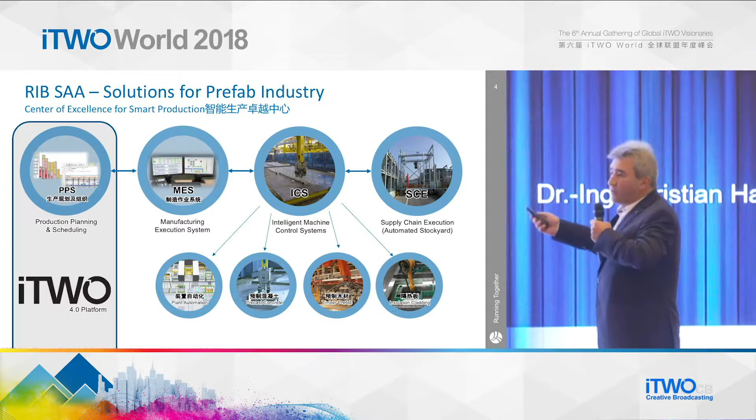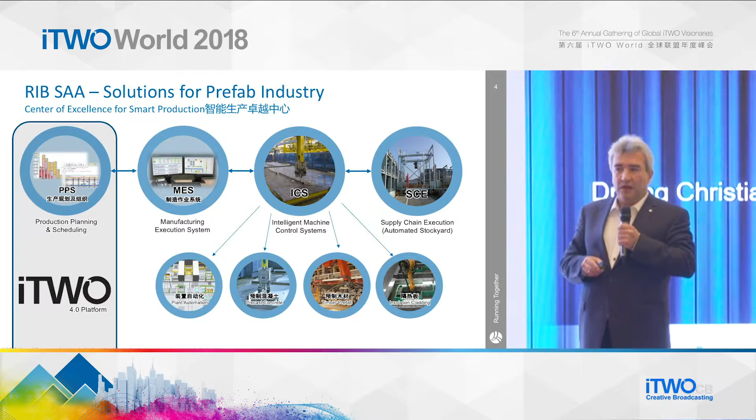That's about our solutions, our capabilities for the precast industry. You see, PPS, production planning and scheduling, that's the anchor in the iTWO 4.0 world. That's where we start implementing the precast planning task, the project management for prefabrication in general. Then it goes to the production, and the MES, the manufacturing execution system, is more or less the brain of the production. There all the planning is done for the shop floor. ICS stands for intelligent machine control. That's the robot systems, the transportation system, the stockyard systems. SCE is a smaller part, that's automated stockyard management, which we will also apply for my home, for example. And on the lower level, you see all these control tasks, the control machines, the different robots for different tasks.

What I want to say in this speech is, first, I go back to modular construction because that was the topic for today. First I want to summarize the building systems. Mr. Jösch has done a lot of that, so I can really speed up that part. Then I want to show you some details about plants we already realized together with partners in Germany, in Singapore, and all over the world. And then I want to line out the end-to-end process we can manage by using iTWO. What can we provide in tools to make the job on the shop floor easier for the people, to bring the work to the people and not the people to the work, as André lined it out in the last speech.

Modular building systems, there are typical methods. If we talk about concrete, then we can cast it in module molds, either with a movable kernel or with a kind of Upcrete technology. That means you pump the concrete from underneath into the mold and get it cast as a complete mold, or cast it in a so-called C mold and turn it by 90 degrees sidewards.

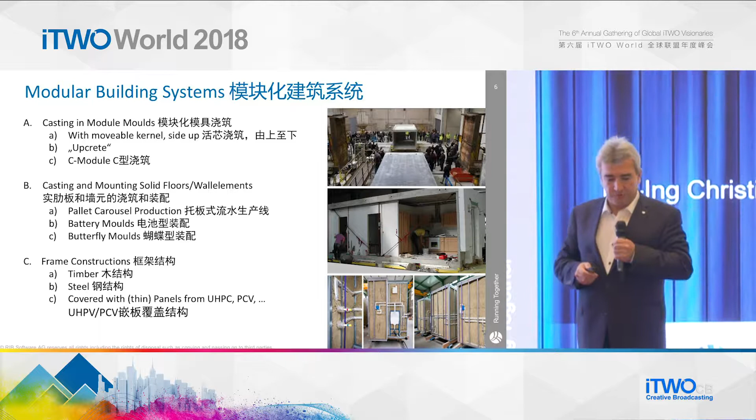Once the module is ready, you need a lot of tasks to finish it, to make a complete installation in the production facility before you deliver on site. You see on the right side some pictures of such a finishing line. MEP is a big issue. Then bathroom installation is a big issue. Flooring, roofing. All these things have to be done on a kind of continuous work on the module to get it done and to get it to the stockyard.

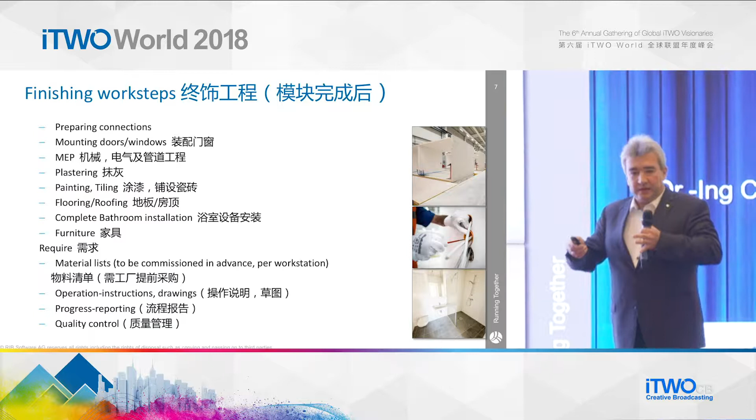And to support that process, we had to develop a lot of new functions in our MES system to support that by means of material lists, by means of instructions, so that the operator knows exactly what to do, that he can see the drawings on his workplace. And we also want to get a feedback about how long he has to use for this task, and to get a feedback about a bottleneck analysis of the process. And last but not least, quality control is very important. Otherwise, you plan with repair from the beginning, which is definitely the wrong way to do it.

One of our recent projects, we are nearly finished, is at Max Bögl. Max Bögl is the biggest precast company in Germany, and they have set up a completely new factory for producing a module system for modular housing. They have invested a lot of time and a lot of effort to find out what's the best building system for it. And they outlined also the big advantages they get from that.

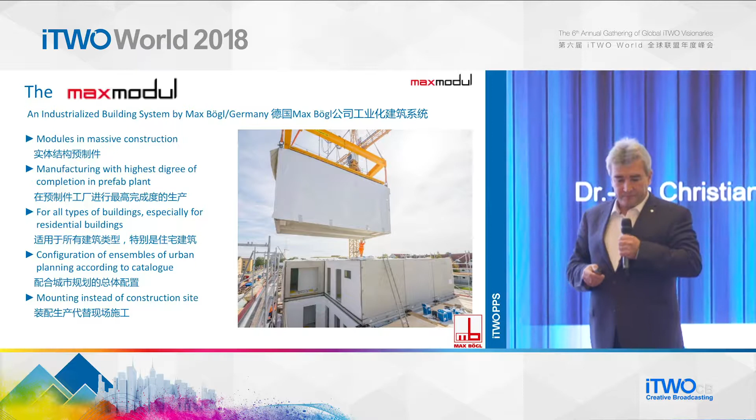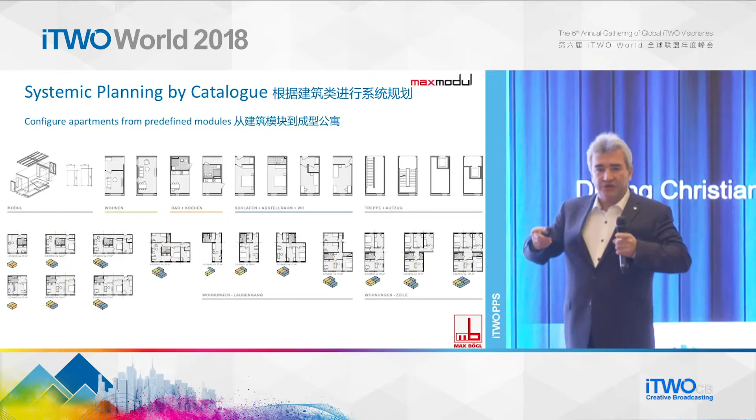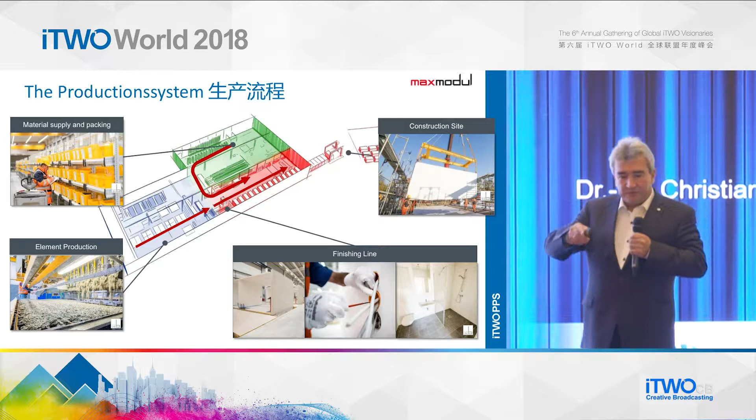If we look at the production line, you see at the upper left corner that there is enormous stress on the logistics. You have to prepare all the material on time to have it ready for all the work steps on the finishing line. The element production, that's well known, more or less. We produce the wall panels, we produce slab panels, and we put them together in a module. But to have all the parts for MEP, for painting, for tiling, right on time, right on the spot where it's used, that's a huge logistic task to do. And at the end, we have to ship it in a more or less container size, as Chris said in the beginning, and then mount it to the building itself.

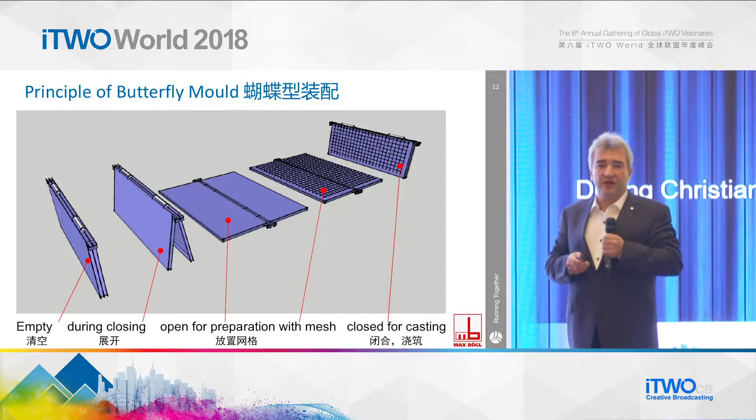What's now a battery, a butterfly mold? You see it here in a sketch. There are two molds which combine the advantage of horizontal preparation with reinforcement, with mount parts, and then clap it, hang it on the crane, put it in a battery mold, and cast it there to have two smooth sides after casting. And that works like this. This crane is fully automatic. The MES knows where to put it, how to put the two sides together, and then an automatic concrete spreader does the rest and fills it up with concrete.

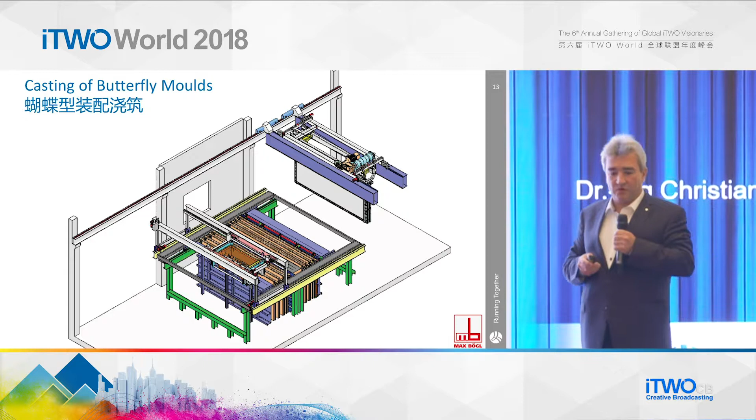The production line for the finishing task looks like this, and it starts, and that's also a very important thing to point out, with, let's say, cosmetics on the concrete and milling of the connection plates. The type of connections Bögl figured out was to cast connection plates with the modules, and then put the whole module in a big mill and mill it on all sides to have really accurate edges to put the modules together at the construction site.

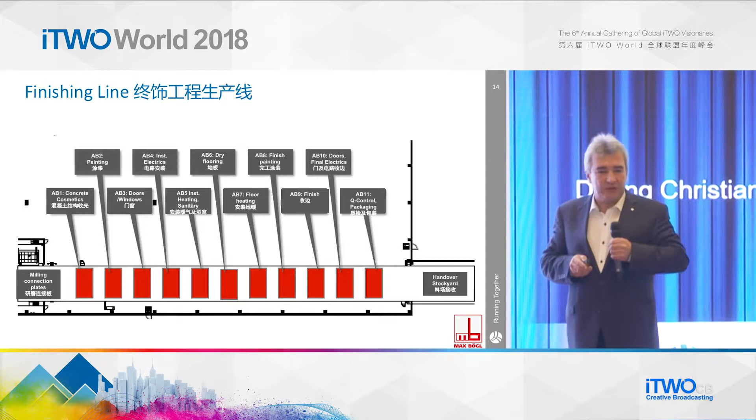That's different from many other systems. I just had a discussion in KSA, in Saudi Arabia. They say we don't have an earthquake issue at all. We simply put them together. We don't need any connection at all. That's completely different, and in China it would be much more difficult; you have to spend much more brain and much more ideas on the connections to cope with the earthquake issues you have here.

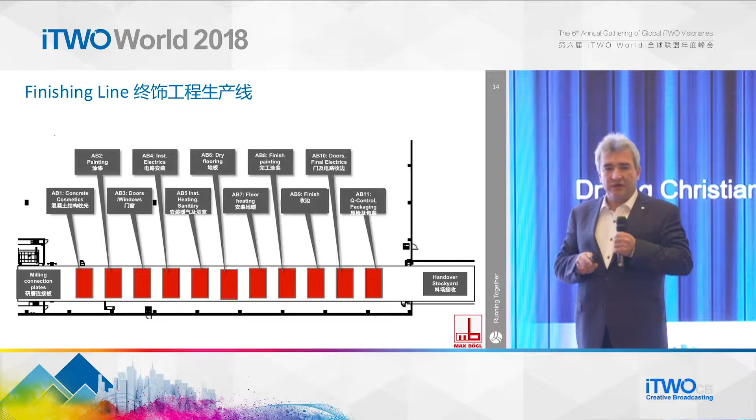A few photos in the finishing line. You see the modules move through the finishing line, and every work step is designed so that it can be done within 1 hour. So every hour, one module comes out of the production hall and can be either stacked in the stockyard or directly transported to the construction site.

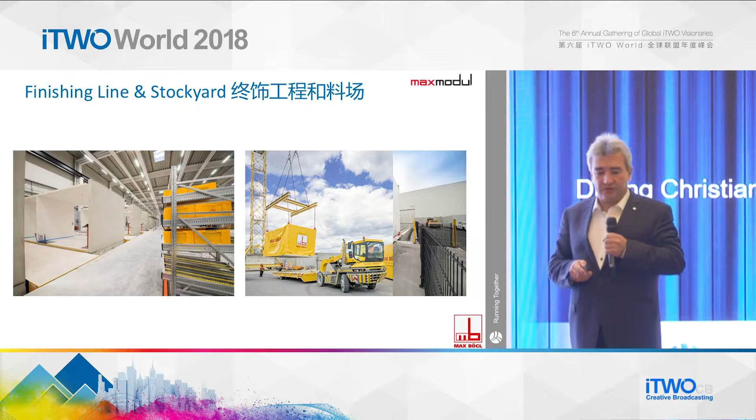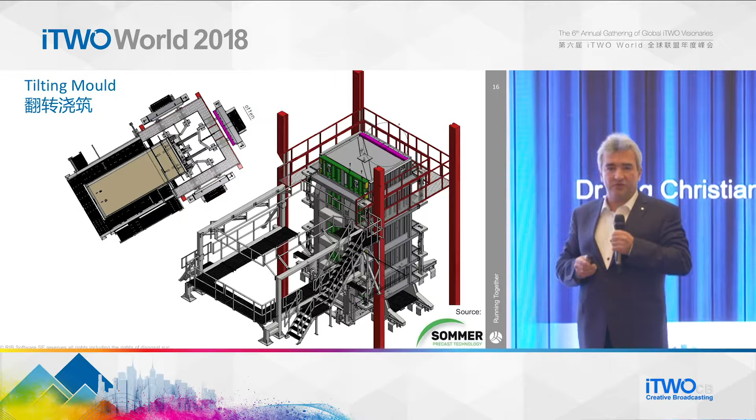A second system I want to outline shortly, that's a tilting mold, where it's a really big machine where you produce the whole module with a movable kernel and then tilt it by 90 degrees, so upside down, more or less. And that's used for garages, for example, but even also for room cells like this. We have 2 clients in Germany which are using that kind of system for doing their modules.

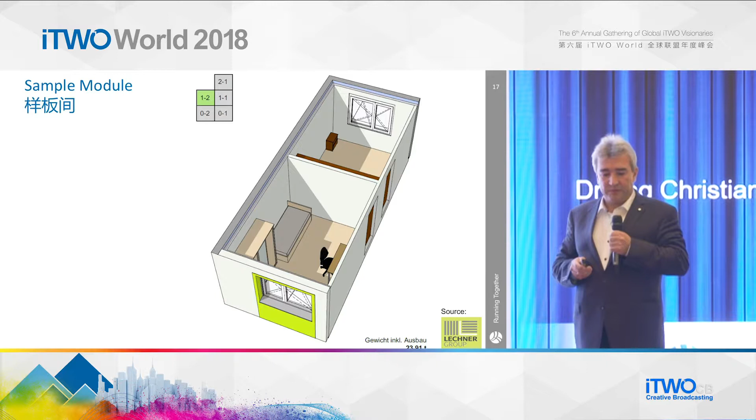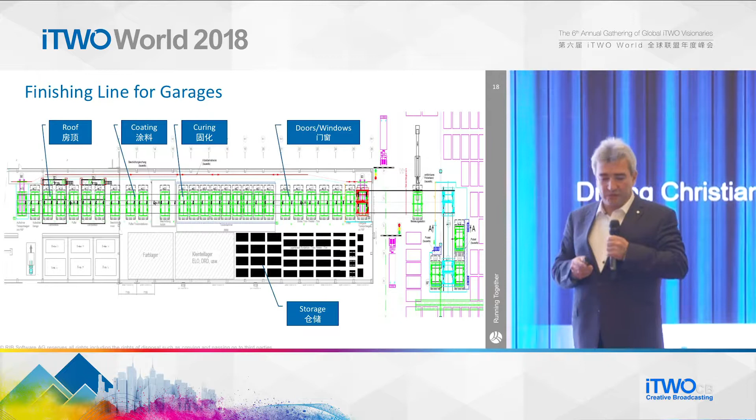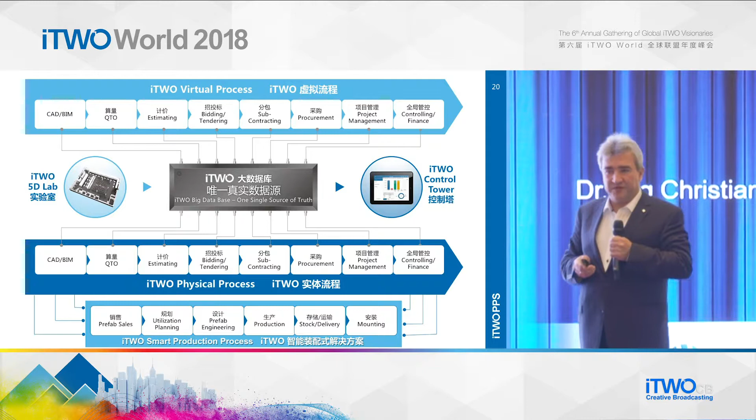We support the whole end-to-end process for all kinds of prefab constructions, especially for module construction. We have extended our offers. This process you know well, or we have seen it several times in the iTWO charts.

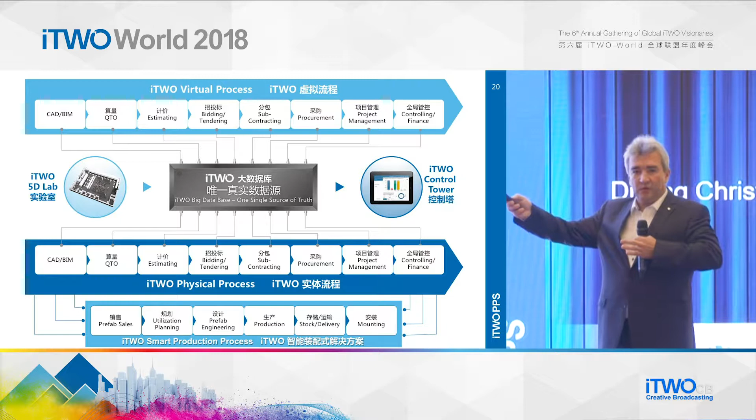So that's the digital twin, which we start first. We do the virtual modeling, and then we are able to compare it with the physical process. And in every stage, we can see what's the difference in budget, what's the difference in time. And if we add the precast process, then we have that already included in the PPS modules directly in iTWO 4.0.

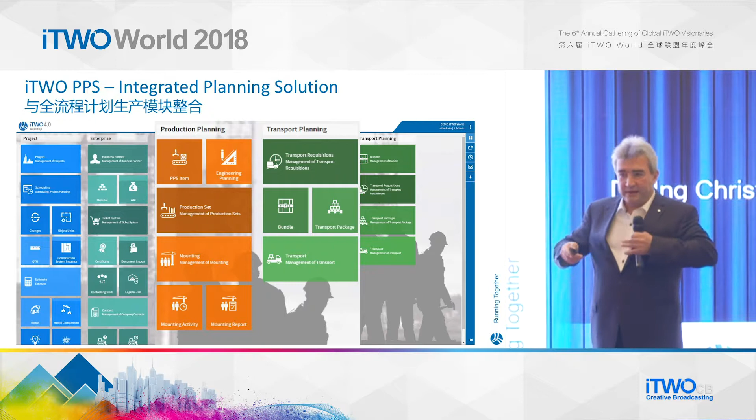And it looks like this. That are the modules we supply in iTWO 4.0. And I want to point out in the process the prefab engineering, which is a very, very important step in between, because there you take the design drawings and you add all the details for production. Otherwise, you won't be able to do any automation in the production if you don't add all the geometric details of the mounting parts, all the details of the reinforcement. That's really compulsory to get any level of automation in your plant.

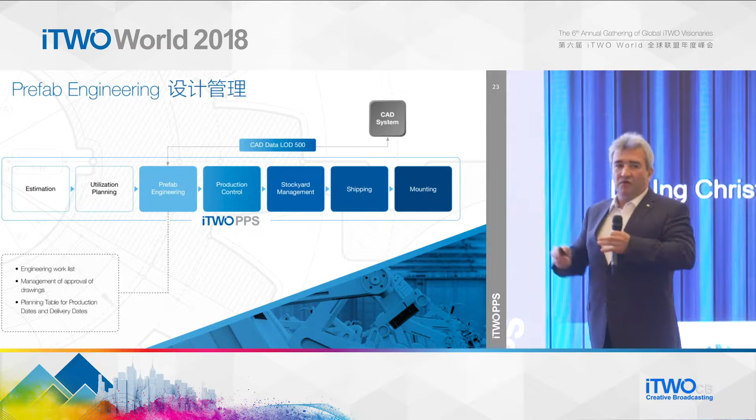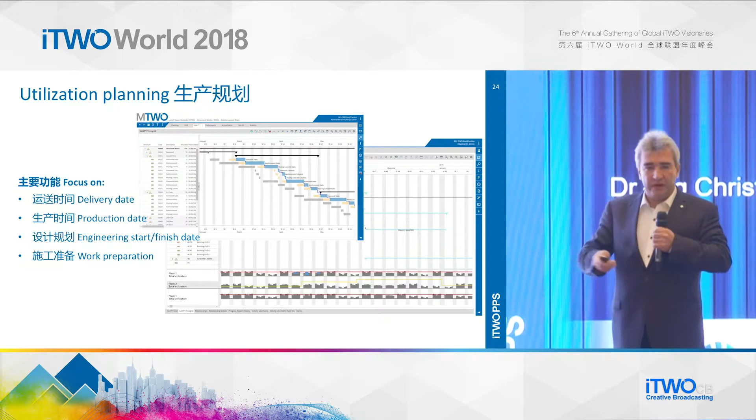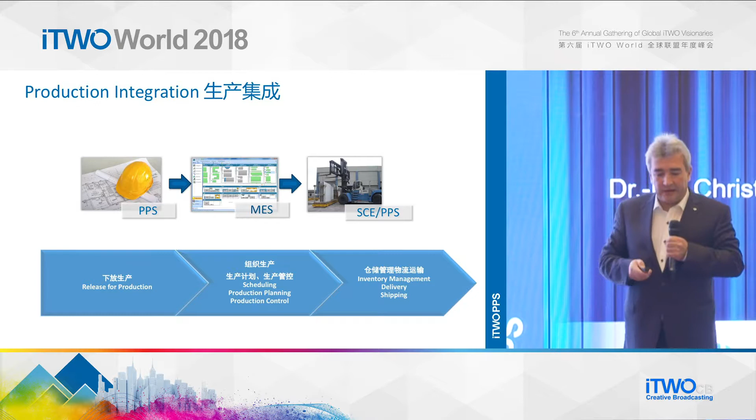And then you have to do your capacity planning for sure to know when you have to produce the parts and when you have to deliver them. And once you can release production, all the data is handed over to the MES in the production facility, and there the whole production management is done by the MES.

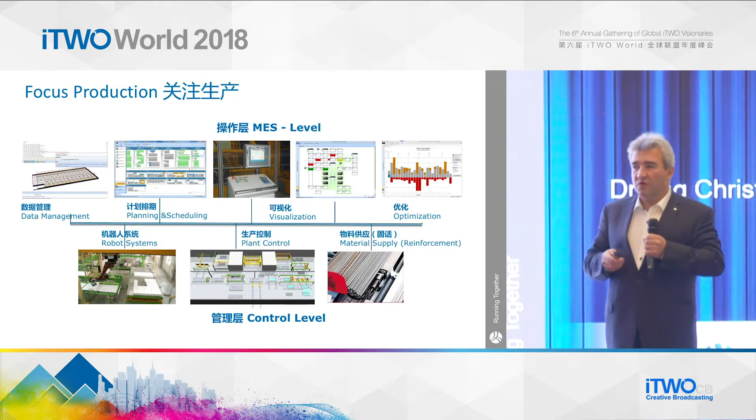And at the MES level, we start with the so-called BIM qualifier. We qualify the data, we check the data if it's sufficient for production according to the applied automation stage. Then we have to do the production planning, put panels, slabs on the molds, or prepare it for full molding.

And during the production, the MES distributes the data to the different machines and gets back the feedback from the control system. And in that stage, you only have to monitor if there is any error in the system or any failure. And at the end, you do your reports, you do your bottleneck analysis, and you see what you could afford during the supposed production time. That is a summary of the tasks of the MES. But what I want to point out is how we can support that, and we have a short video.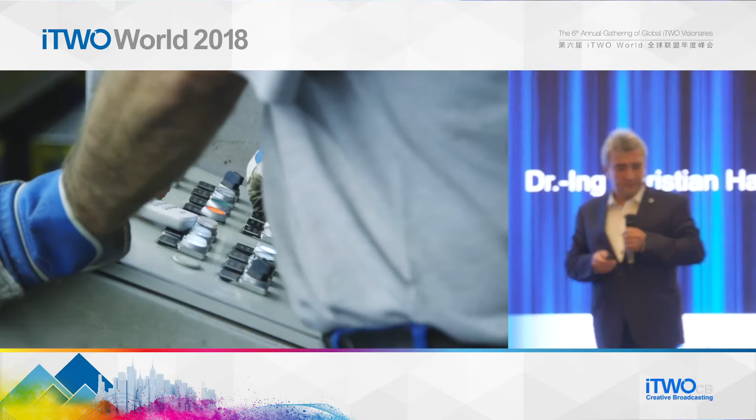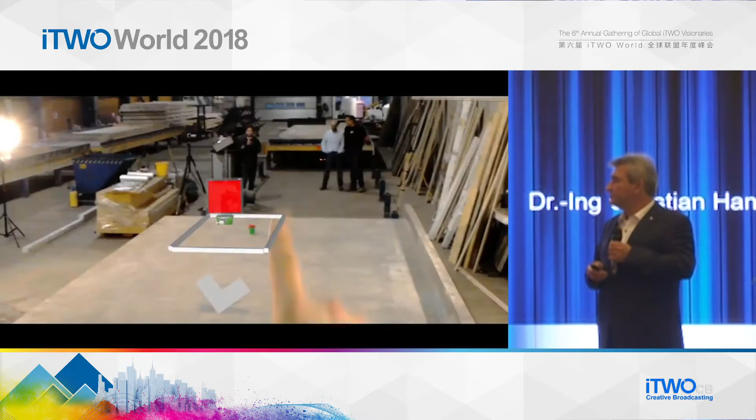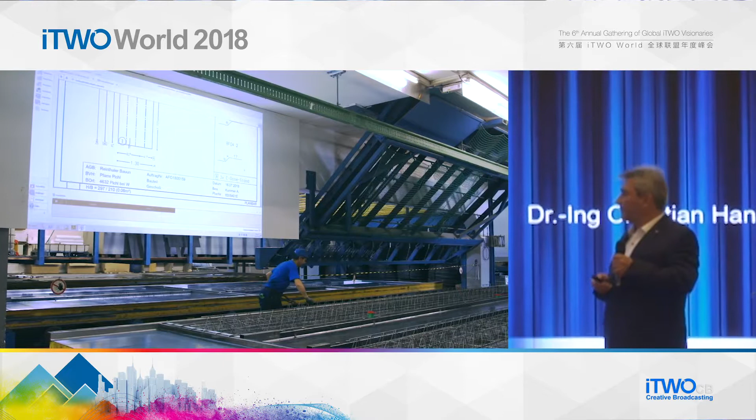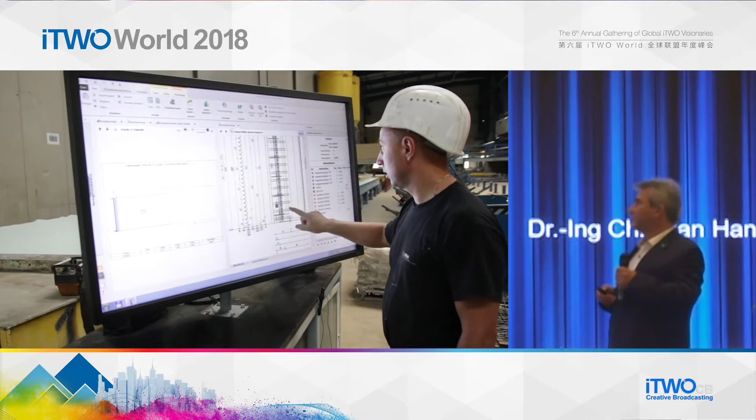One part of the Smart Factory concept is to support employees with new hardware, such as large touchscreens or iPads to digitalize production. RIB SAA has turned this into reality by offering iTWO Smart Production Solution, an intelligent software solution that digitalizes the entire concrete prefabrication automation management process. The system contains multiple options for extracting production information, allowing for necessary information to be directly available on the working station devices. With an intuitive user interface, the system empowers smooth workflow management.

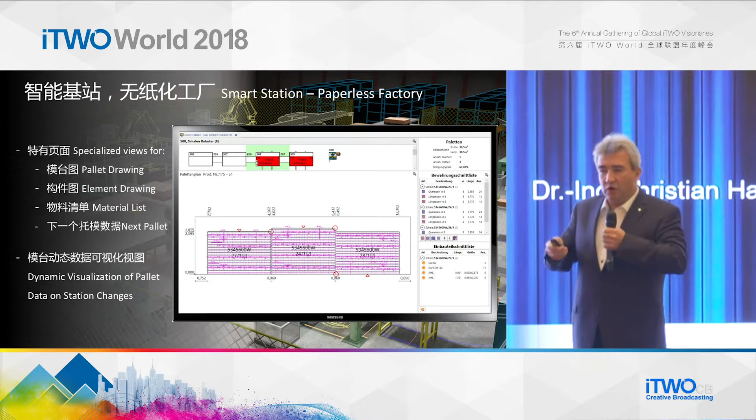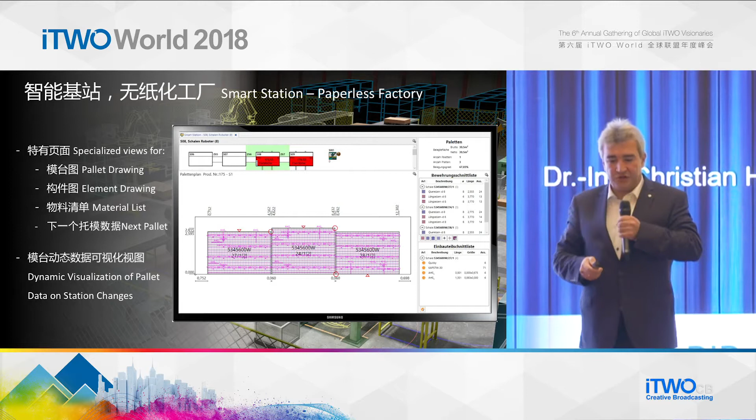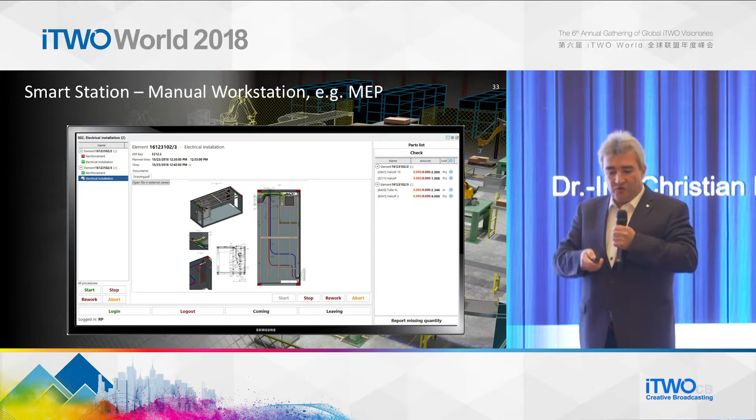To explain it a little bit more for the modular construction: we call that smart stations. We bring the smart information to the work steps on the shop floor, for example, to avoid paper at all, because then you are fully flexible with your planning. You see here a drawing of the pallet which shall be produced. You see also a material list which is needed for the worker on that station. If you look now at the next station, for example, you see the drawing for the MEP. He can zoom in, he can directly access the drawing for module construction.

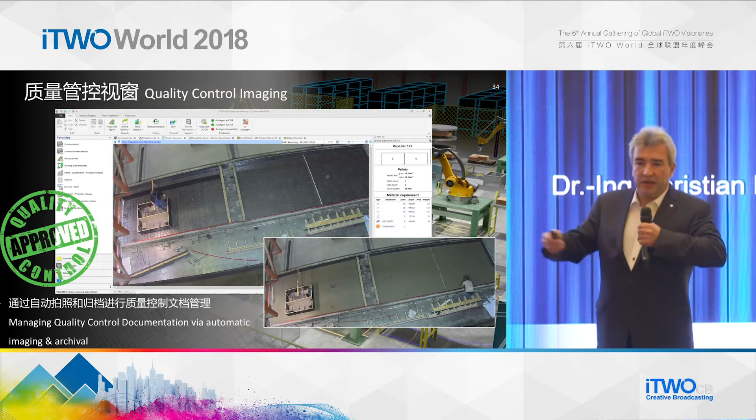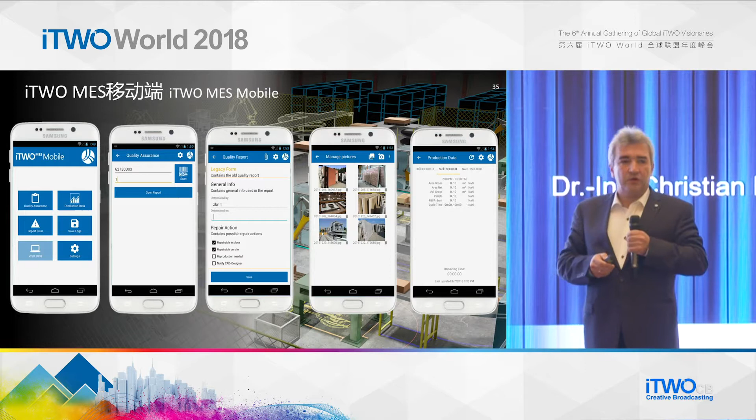We can also apply quality cameras to take a photo of the module, of the pallet, wherever in the plant, put it into the database and make it accessible if you get a reclamation from the construction site later on, for example. And we have apps for smartphones, for tablets, to manage all this, to take photos on the stockyard, take photos on the construction site, and store that with your model and with your production data. You can also add quality reports by clicking a set of malfunctions or failures on the product, for example.

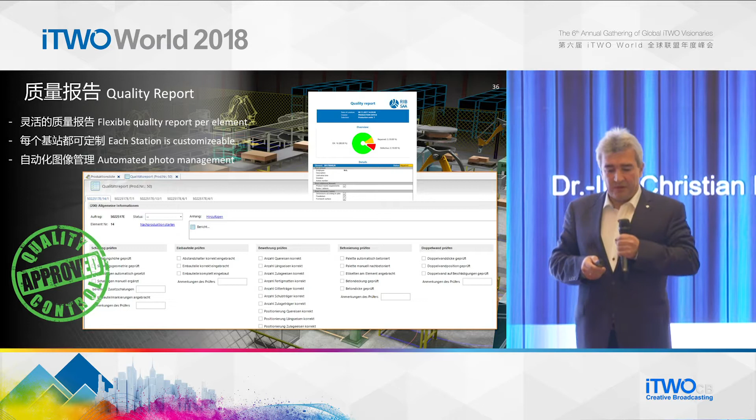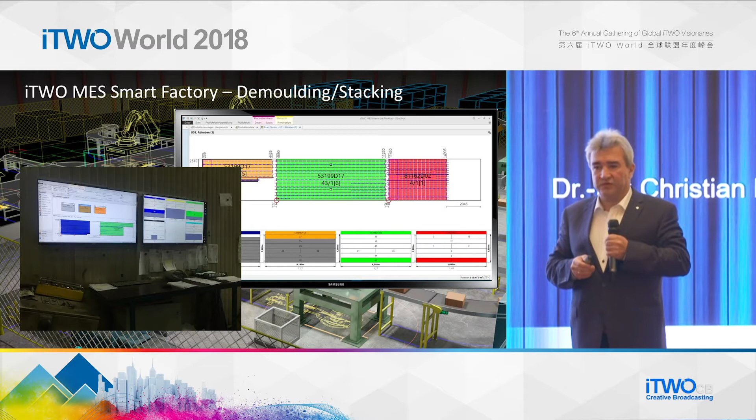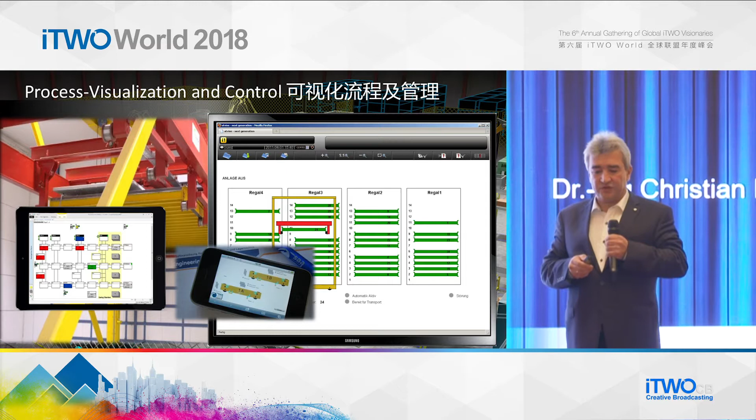We have a smart station for demolding. The colors show you exactly where to put the panels. If you mix up different stacks for transportation, you can easily find the way to move them to the next stack, to transport it to the stockyard and later on to the construction site. And we support the workers on the control level with the visualization screen. And with the online statistics, we can show on a big screen in the production how far it is, what's the trend, are you on schedule, or do you have to speed up?

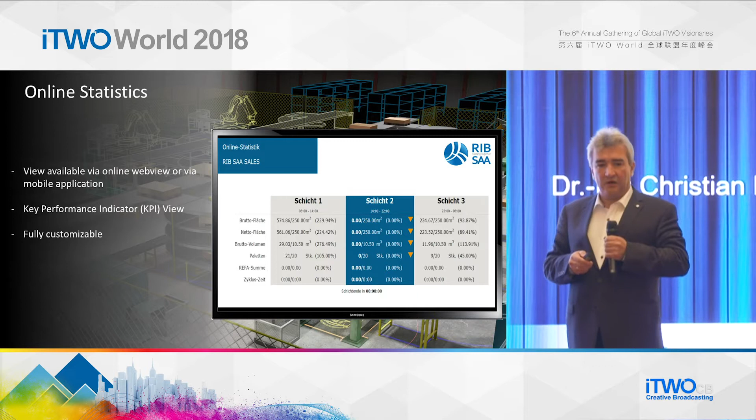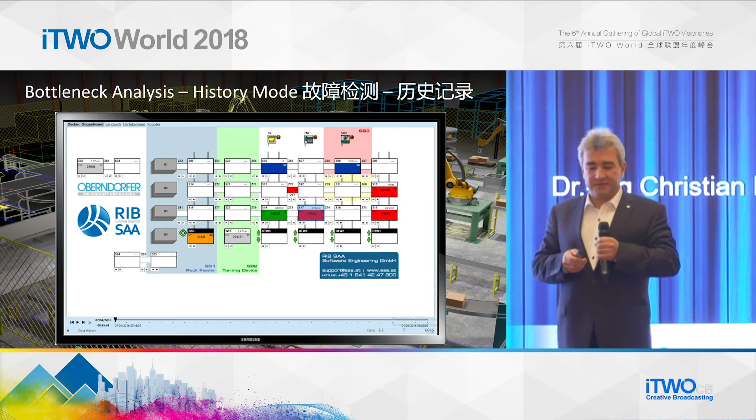Last but not least, we can go back in the history. We can move the operation of the plant to any specific time and analyze what has happened then, why we produced more or less than expected, and give that in graphical reports.

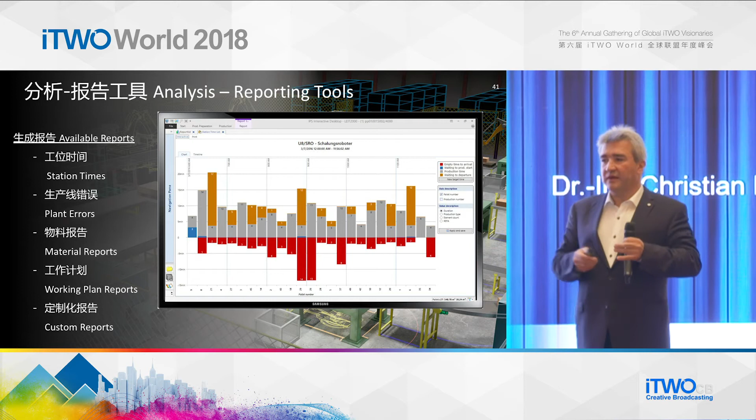So that's how we can support a production facility, how we can support even module construction, which has more needs than a standard panel production, and that's how our clients like to work and what they are equipped with. Thank you very much.